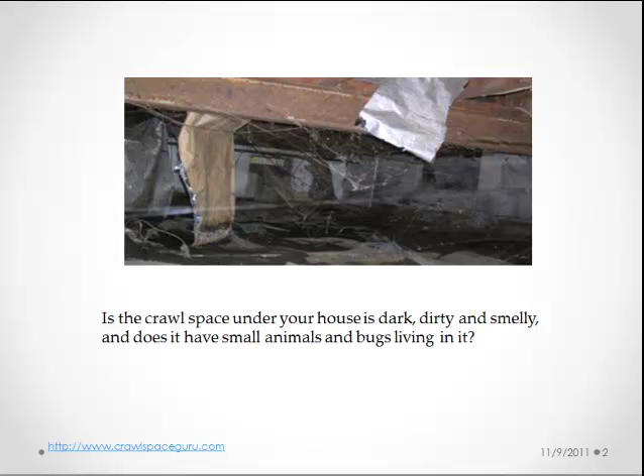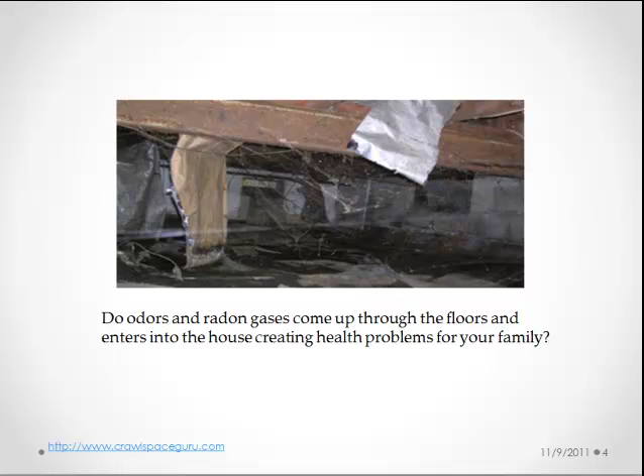Do you need to fix the crawl space under your house? Is the crawl space under your house dark, dirty, smelly? Does it have small animals and bugs living in it? Does cold air get under the house in the wintertime and make your floors cold? Do odors and radon gases come up through the floors and enter into the house, creating health problems for your family?

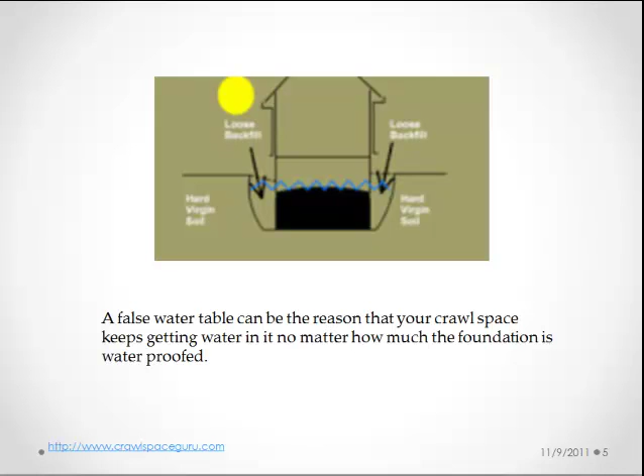A false water table can be the reason your crawl space keeps getting water in it, no matter how much the foundation is waterproofed. High moisture in the crawl space condensates on ducts, all surfaces, and causes the insulation in the floor joists to fall out.

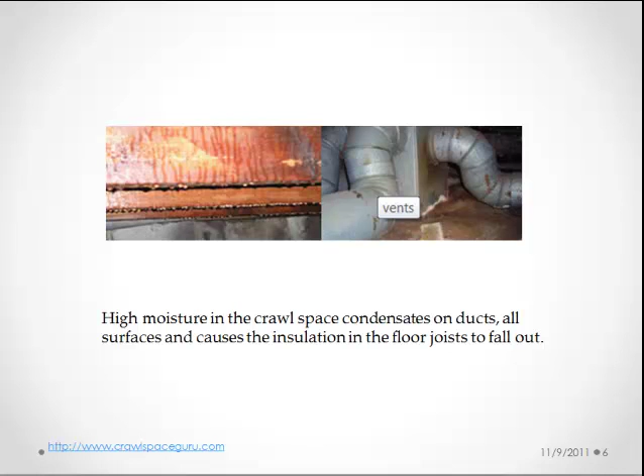To correct the problem, first clean out the crawl space, rake up any rocks, old lumber, old insulation. You'll need a good pair of coveralls, gloves, and a breathing mask. You'll also need safety glasses and a light to see with.

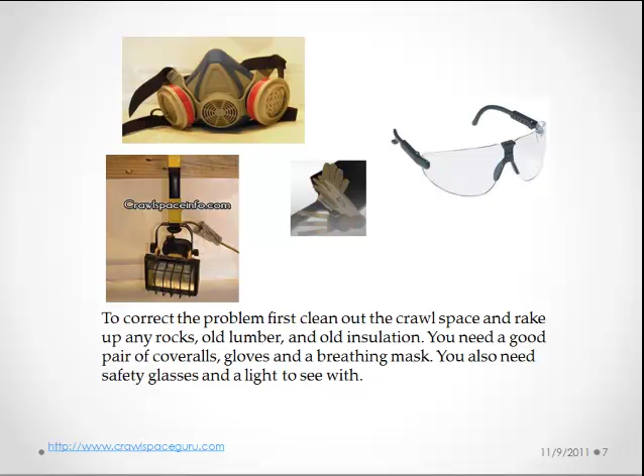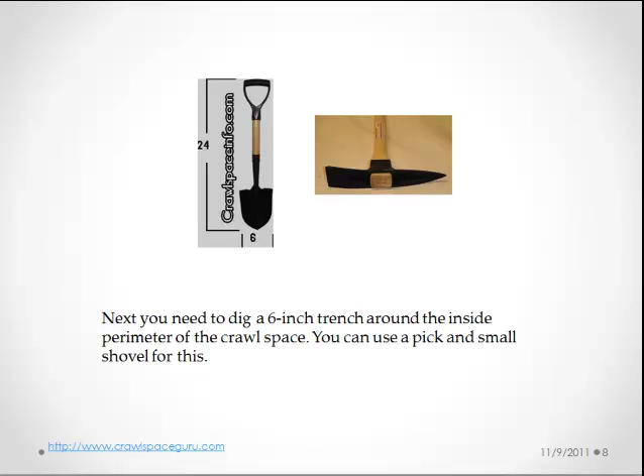Next, you'll need to dig a 6-inch trench around the inside perimeter of the crawl space. You can use a pick and a small shovel for this. If the soil under the house is hard clay, you might need to buy or rent a demolition jack and shovel. Next, install a flexible pipe with black sock around it.

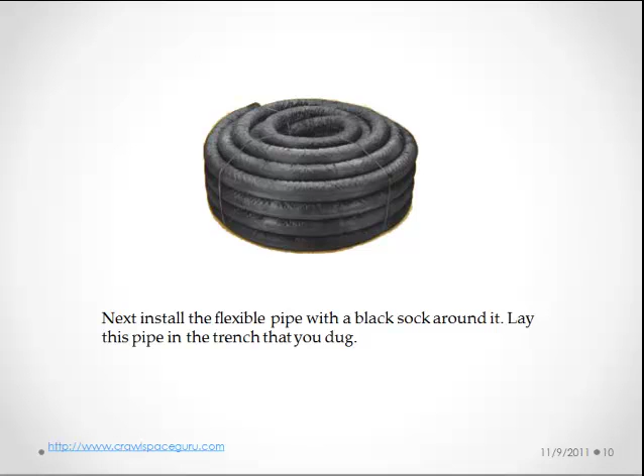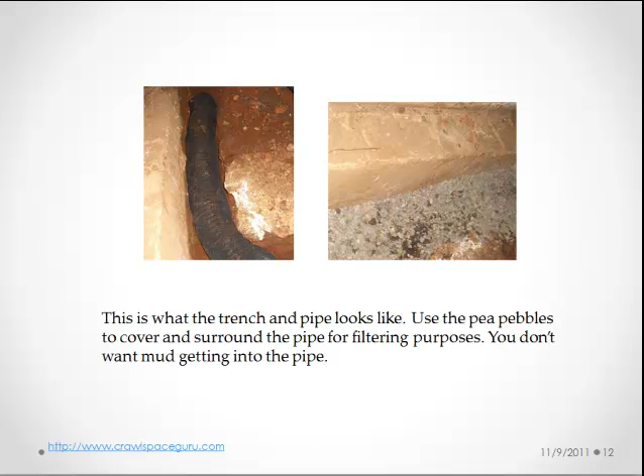Lay this pipe in the trench that you dig. Use pea pebbles in the trench around the pipe to filter out the mud that might get into the pipe. This is what the trench and pipe looks like. Use pea pebbles again to cover and surround the pipe for filtering purposes. You don't want mud getting into the pipe.

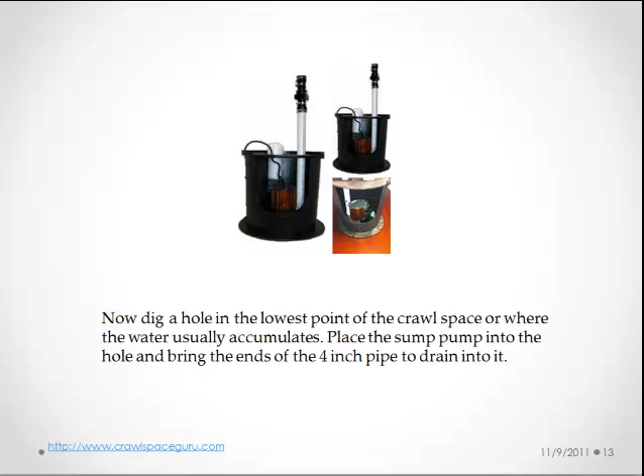Now dig a hole in the lowest point of the crawl space or where water accumulates. Place the sump pump into the hole and bring the ends of the 4-inch pipe to drain into it. Now measure the crawl space and order a vapor barrier. You'll need to cover the floor, walls, and the supports.

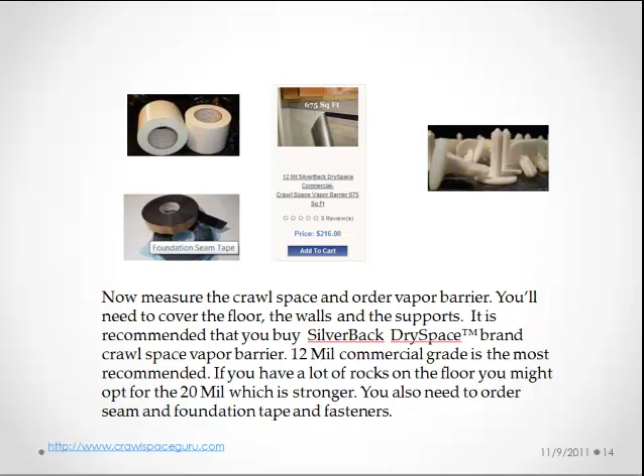It's recommended you buy SilverBack DrySpace brand crawl space vapor barrier. 12 mil commercial grade is the most recommended. If you have a lot of rocks on the floor, you might opt for the 20 mil, which is stronger. You'll also need to order seam and foundation tape and fasteners.

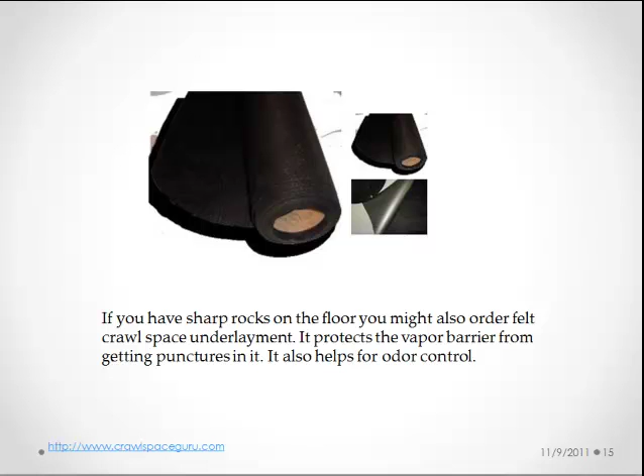If you have sharp rocks on the floor, you might also order felt crawl space underlayment. It protects the vapor barrier from getting punctures in it and helps for odor control. Line the tops of the walls with foundation seam tape. Then drill holes in the top and insert the pins for extra support. You'll need to buy or rent a hammer drill with a 1/4 inch cement bit. A regular drill will not work.

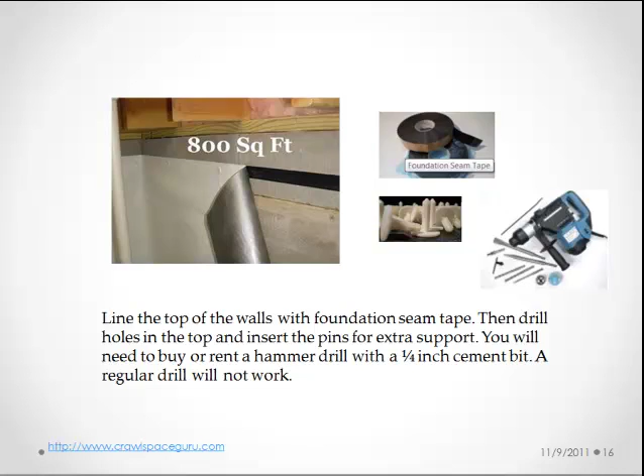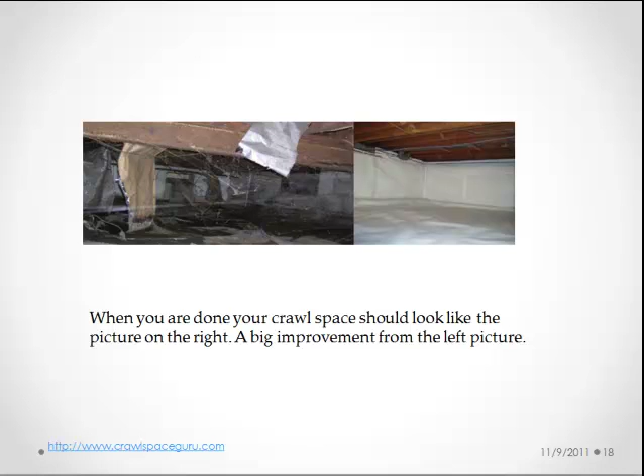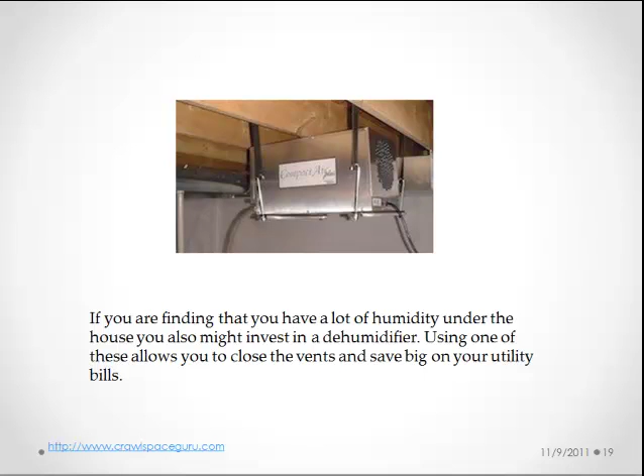Use the seam tape to seal all seams in the vapor barrier. When you're done, your crawl space should look like the picture on the right, a big improvement from the left picture. If you're finding that you have a lot of humidity under the house, you might also invest in a dehumidifier. Using one of these allows you to close the vents and save big on your utility bills.

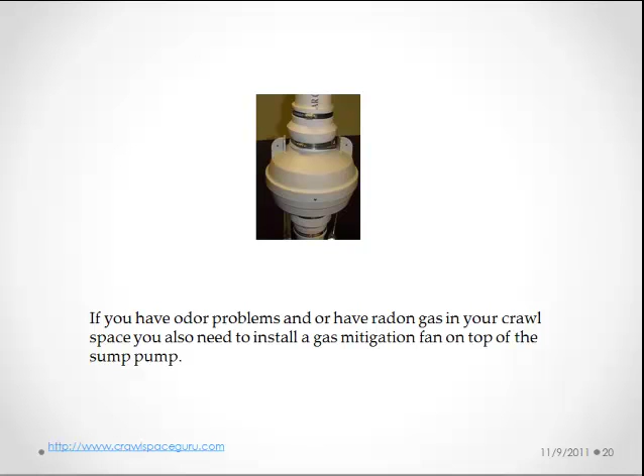If you have odor problems or have radon gas in your crawl space, you also need to install a gas mitigation fan on top of the sump pump.